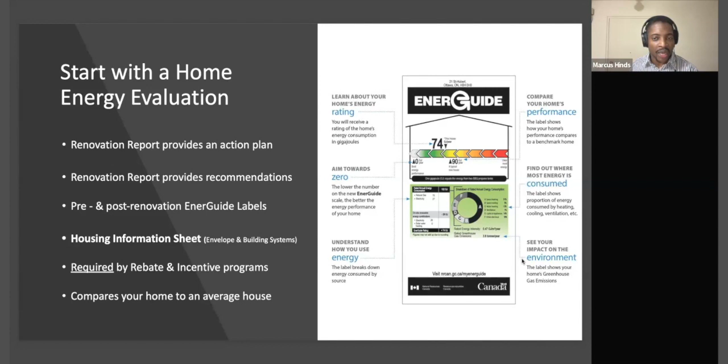Is it under your window seam? Is it a tiny little crack under your kitchen sink, under the cabinet? Is it just behind your couch? Is there a tiny little hole in the drywall that air is coming in? You're looking for where that air is replenishing itself from, because what that links to is draftiness. On an average day without any fan, just with some ambient wind outside, that's how that air will get into your home. And when you're watching TV and you just feel this breeze on you, that's where it's coming from. So they're looking for those areas.

And with those areas, they'll comment on how they could be sealed up, because then that will make your home a little bit more airtight, right? So once they're doing that, they're measuring the air tightness of your home. And they'll give you a little number on a scale from 0 to 15, which is called the air tightness ratio, or the air changes per hour, essentially. So that little rating will tell you how drafty your home is.

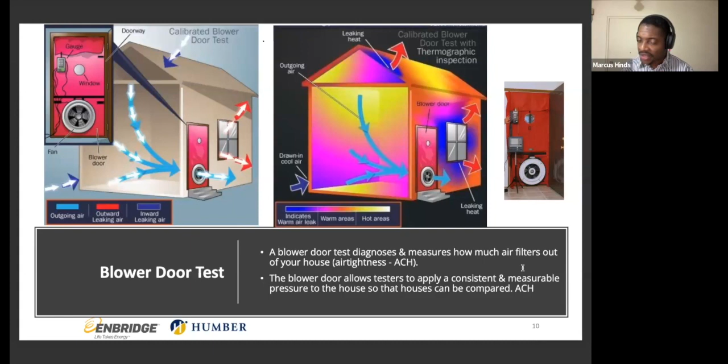Closer to 15, very drafty, of course. It means that the air replenishes itself 15 times in 1 hour, which is quite high. Closer to 0 is a little bit better, a little bit more sealed tight. So that's where you want to be on that scale. Closer to 0, generally around 3.5 is the average, anywhere in that region. But they comment on that as well. So like I said, it's a lot of great information that comes out of that evaluation.

Now, someone just mentioned an R value, and what that R value really means is the level of insulating quality that your insulation has. So let's say maybe my hand here is a piece of insulation. If I stuff this into a wall, how well can that piece of insulation resist passing heat through it? That's really what your R value is all about, right? So the higher that value, the better it is at holding that heat in, right? The lower that value, it's just going to let that heat right through.

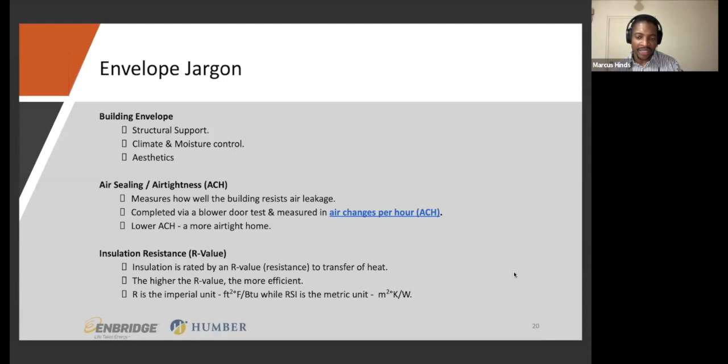So the main thing with your home is you want some nice insulation. You want insulation that can provide an adequate R value so that your home is nice and airtight. And we'll talk about some examples and some different areas where that's particularly important as well.

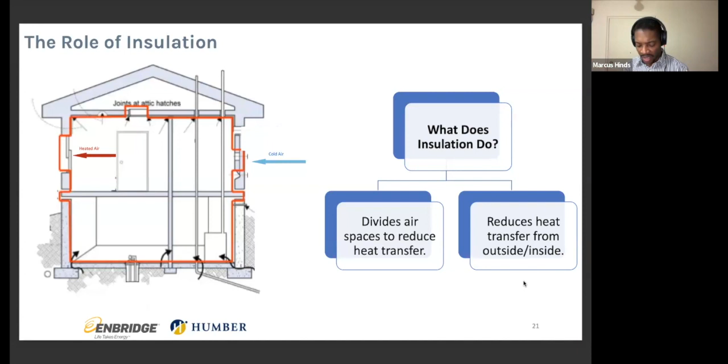So you're going to have nice warm air, especially in a winter setting, on the inside. And the envelope's job is to maintain that air. Nice cool air in a summer setting on the inside, and the envelope's job in summer will be to maintain that coolness on the inside, resist any heat from outside coming in. That humidity that you feel when you walk outside, you're trying to keep that out more than anything else. So the envelope is very, very important for protecting the home and how the home operates across the board.

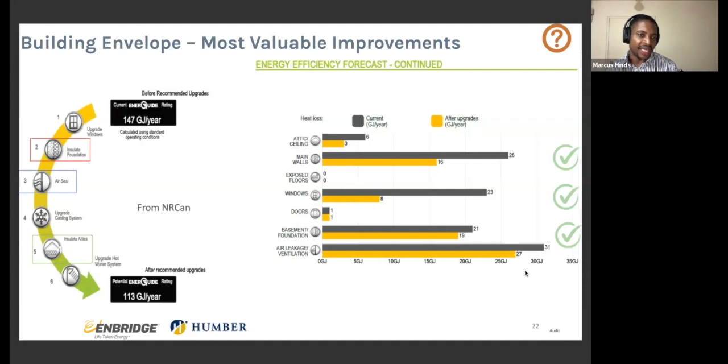Now, looking at an example of that, and this is coming out from an audit that NRCan did. So another test case, another test scenario. Coming out of this audit of this particular home, the home was at 147 gigajoules per year. And they were able to determine a number of different measures that would help this particular home. So you can see here on the left-hand side how they have it illustrated. You have upgrading the windows, the foundation, air sealing, the attic, even the cooling system, the hot water system. And they essentially got this down to 113 gigajoules per year. But the main thing is that this started with an energy audit.

Now, pour foam insulation is very similar to spray foam insulation. The only difference is spray foam insulation usually expands quite a bit when you apply it, right? So if you're applying it to an older wall, let's say a brick home that doesn't have any insulation, you may not necessarily want spray foam because it's going to expand in place. It's going to be pushing on those walls from the inside. And that's not necessarily something that you want, right? So in that particular case, pour foam insulation may be something better to use. Now, there are quite a few companies doing either, so you can ask a lot of questions about those.

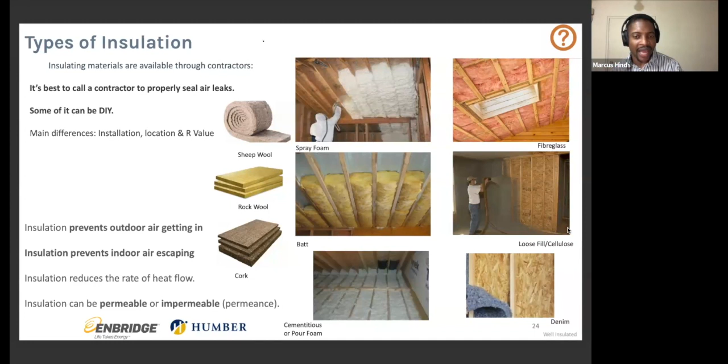Now, for any homes where your furnace is approaching, I'd say 12 years generally, especially if you've never had that furnace serviced, one of the things that you should consider is replacing that furnace. Because anything that's approaching, let's say 10 to 15 years, generally it starts to decrease in its fuel utilization value. So it's not usefully combusting fuel anymore. Some of that fuel is being wasted, especially if it hasn't been serviced.

Sometimes the burner tips get soot and fouling and stuff like that, and they're not combusting as they should. And that's also going to impact what you use as well, because you have to take in a little bit more fuel to keep the home at one particular temperature. It's just that more of that fuel is wasted compared to taking in that fuel and actually combusting all of it, right? So even if you're considering that, consider a furnace replacement. That is something that can be helpful.

Now, another option that homeowners have when you get your energy evaluation done is you can get a sizing calculation done. That sizing calculation really looks at the size of your home, the square footage, how many windows you have, how many floors you have, and things like that. And it suggests the design standard for furnaces or for any heating equipment that should be there. What that really just means is it sizes it to your specific home, so that it's not oversized or undersized.

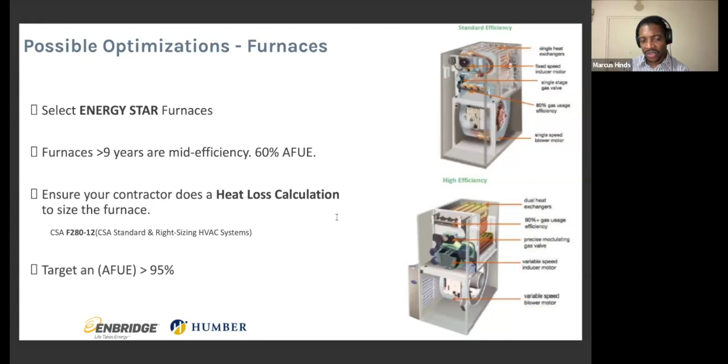So you can get a heat loss calculation, and that heat loss calculation will tell you exactly where you need to be. Okay. So for any new equipment that you're considering, consider a fuel utilization value of 95% and more.

Now, Energy Star rated units, there's several of them on the market from several different brands. They have a number of great features that help quite a bit. One of the things is that they use better equipment, better fans, lighter weight components, stronger materials, and so on. That can give you an increase in efficiency of 15% just off the bat, right? So that's one of the things that can be useful.

And then they have sometimes 2 heat exchangers, 3 heat exchangers instead of 1. So when you get that combustion process, you're really extracting as much heat as you possibly can, to the point where you've gotten just about 95% or so of the heat out of that to then deliver into heating the home. So they're a lot more efficient in that regard.

Now, they also have things like sealed combustion chambers. If you look at those older furnace units, sometimes you'll see a pilot, a little flame way underneath. The newer units eliminate all of that, right?

Because it has better fuel management and ignition management, it'll only ever be combusting when it needs to, instead of constantly combusting. So those are all things that help with fuel savings and energy efficiency. There's also flame modulation, which fits a tiny valve that responds to what's happening outside. If it's a very cold day, that valve opens up and you use a bit more fuel to provide more heat. If it's a warm day, you restrict that valve a little. The furnace does all of this by itself, controlling itself more than anything else. So that's something that's particularly useful.

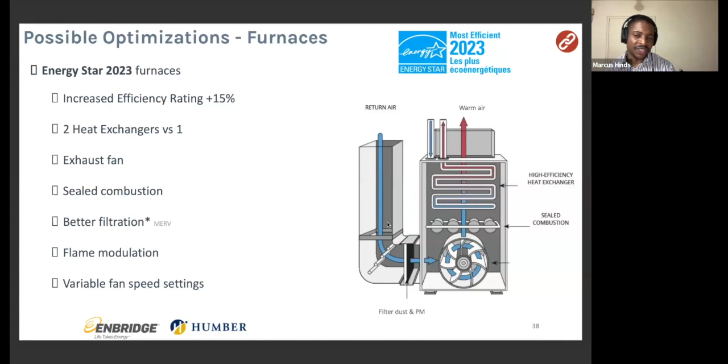So they're inherently more efficient, and they can be better in that way as well.

Now, the same thing with air conditioning units rated Energy Star. They automatically come with better compressors, saving sometimes as much as 30 to 35%. Those compressors, because they're more robustly constructed, usually have a better warranty. And in many cases, they use better refrigerants as well. If you remember in the 2000s, quite a few refrigerants were banned because they weren't very eco-friendly. The newer Energy Star units use more eco-friendly refrigerants. So that is one of the things to consider, especially if that's important to you. For cooling equipment, air conditioners, anything over 20 is generally suggested, so if you can get something like that, that's useful as well.

And for rebate and incentive programs, one of the things to consider is that many of the units you install should be, or at least should be assembled in Canada. Even if they're not made in Canada, they ought to be at least assembled in Canada.

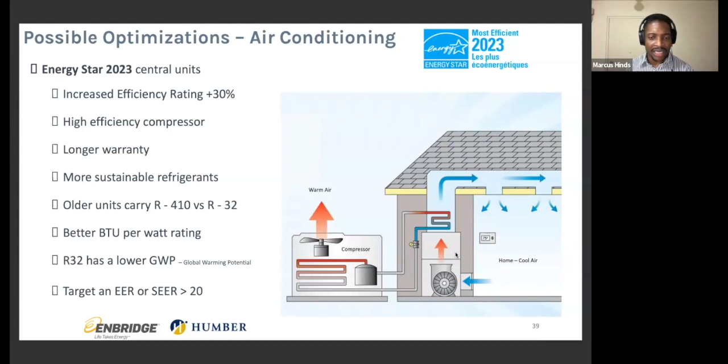What you can think of a heat pump as is a special air conditioning unit that can work in reverse. So it can provide cooling, but then work in reverse and provide heating. It's particularly useful because in many cases where you have a heat pump installed, you don't necessarily have to use an air conditioning unit and you don't have to use a furnace. You can use just this one, and it can handle all the heating and cooling needs for your home. You also have them sometimes as dual fuel, as they're called, where it's integrated with a furnace.

They're generally good down to about -20 to -25, depending on the actual unit and on your home's insulation. But generally, if it gets colder than that and your home needs more heat, the heat pump works in tandem with the furnace, which comes on stream and provides all the heating needs the home is calling for. So they're pretty useful, pretty robust, and designed for specific cold weather zones in Canada.

So you have an air source heat pump, which uses ambient air, actual air, to extract the heat from that air and uses that as fuel. That's the one that works like a refrigerator or an air conditioner in reverse.

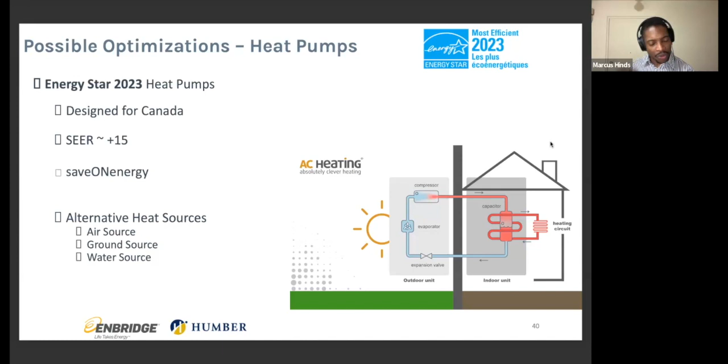You also have a ground source heat pump, where you'll have a kind of hose installed all around your home, buried in the ground under the lawn. That hose absorbs heat from the mud, and mud actually holds lots of heat. It uses that mud to put heat into your home. And mud, of course, replenishes itself, so it always has that heat. That is one of the sustainable ways you can heat your home, and this is great for off-grid homes, cottages, lake homes, country homes, and things like that. A lot of persons have those types of systems installed.

They're self-sufficient. Another type of heat pump is a water source heat pump, so persons that live close to a lake, pool, pond, or river can use that for heating and cooling. That is particularly useful if you have that option. These are great for cottages and individual homes, and they use up to 45% less energy in many cases. Now, those are just some of the benefits of heat pumps.

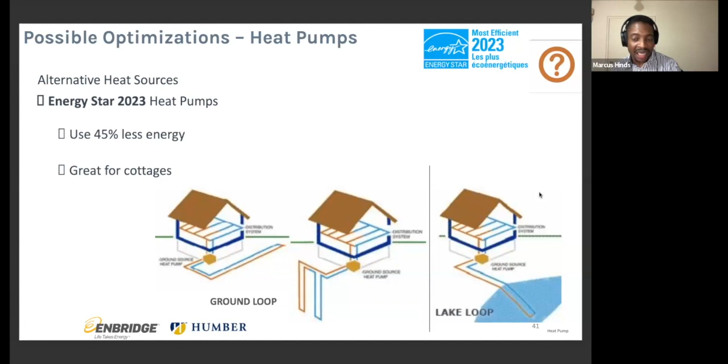The thermostat is the first line of defense, or the first point of contact more than anything else for control. Now, one of the things you can consider is a smart thermostat.

Smart thermostats have a lot of different features that can be useful. Some of them can learn your schedule and control your home based on that. That's a setting you can turn on and off whenever you want. So even if you leave home for, say, 2 or 3 days at a time, the furnace will probably check your location and throttle down the temperature a bit. So that 21 I mentioned earlier, it'll probably take down to maybe 16 or so, so it doesn't actually heat the home. It just provides minimal heating to keep it conditioned, but doesn't bring the temperature up. And that can help you save quite a bit.

Now, even if you try to replace your thermostat yourself, it's relatively simple. There are quite a few YouTube videos, and you'll be able to change it. The hardest thing you'll run into is the different colored wires. Even if they're not colored, they'll have a tiny letter on them that tells you the color of the wire. And the color of the wire tells you what it does.

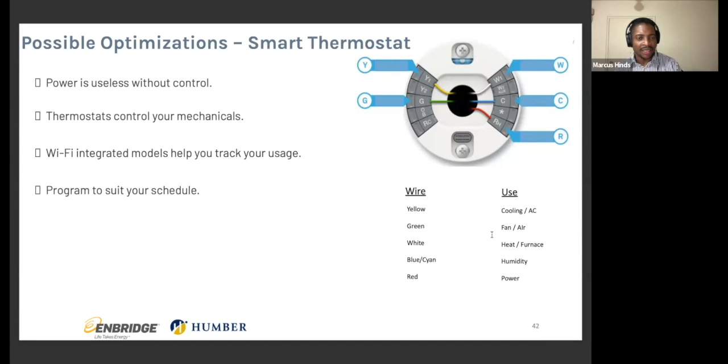So there's a wire that controls your AC, another that controls your fan, another that controls the actual heating element in your furnace, and so on. It's kind of individualized systems that do the heating and cooling for your home. But the main thing is that a thermostat is the very first place to start, because that will be useful and helpful.

Now, something else to consider, I know this has been kind of a buzz for some time as well. If you have a big saucepan, or maybe a kettle, one of those little push-switch kettles you use for making tea every morning, if you turn that on at 8 o'clock, it's going to be nice and hot, really boiling hot. But if you come back at, say, 10:30 or 11, that water is cold again. The same thing happens with your water tank in the basement. It constantly has to maintain the temperature, so it constantly has to be heating itself.

A tankless water heater can reduce that, if this is something you're considering for your home. The way it works is it's attached directly to your hot water lines. As you open the hot water line, only then will it start to heat. It'll heat whatever you need, whatever you use, and then it shuts itself off and throttles down. So instead of constantly warming water, it just heats what you need, delivers what you need, and that's it. It helps with saving water, and with the operation and management of your home as well.

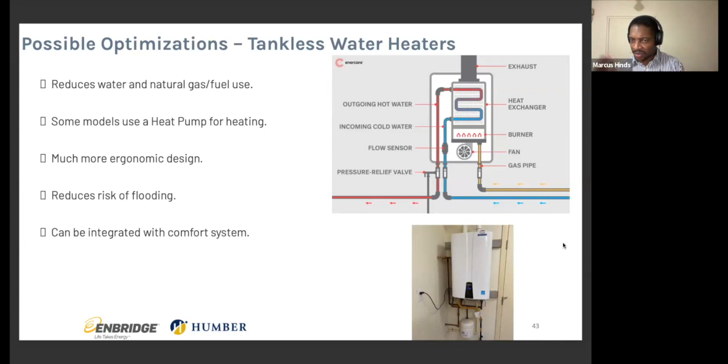Another thing that goes in tandem with this is insulating all of your lines, making sure all your hot water lines are insulated to keep that heat in. That's something you want to make sure is done, because sometimes you can have copper lines running through the home, and if they're exposed, you can feel heat radiating off them. If you feel that heat, it means heat is coming out of the pipe, and that's not where you want it. You want that heat to stay in the pipe, in the water, so you can have a nice warm shower or soak, or whatever you're using it for, dishwashing, whatever. So the main thing is you want the heat to be where it's supposed to be, not dissipating through your basement or under the stairs or wherever.